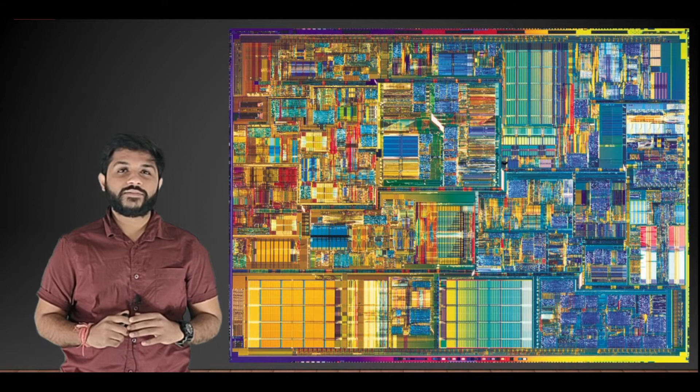The chip that you are seeing on the screen is actually a microprocessor. Now if you see inside that chip, you will see there are billions of transistors which are connected to each other, and there are different blocks which are present in the microprocessor. Some portion is the arithmetic and logical unit, some portion is the register, and much more. But by seeing this picture, you are not going to get which portion is which.

So that is why when you purchase any microprocessor, you will get a reference manual. In that reference manual, you will find how many blocks are there in the microprocessor, and you are also going to see a proper block diagram of the microprocessor. And let's see how the block diagram of the microprocessor 8085 looks like.

So if you want to store 8-bit data, you can use the registers B, C, D, E and H, L. You cannot use the registers W and Z because those are temporary registers, and those registers can only be used by the microprocessor itself. So the user cannot access those registers.

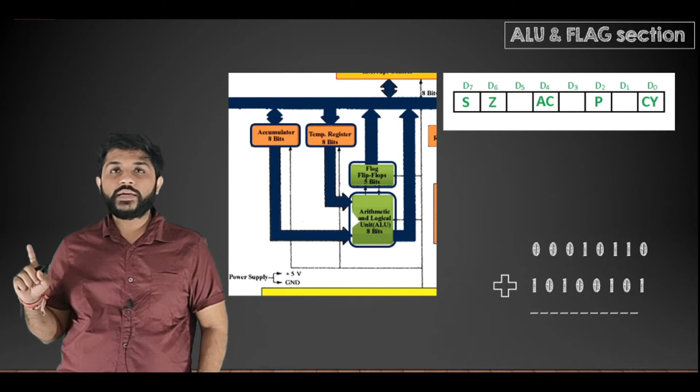So this is the example. We are performing the addition of these two 8-bit numbers. When you perform any arithmetic and logical operation, the flags will be affected. Now let's add these numbers and you will get the answer. Let's name these bits from D0 to D7.

Now for the sign flag: after performing any arithmetic and logical operation, if the value of the D7 bit is 1, the sign flag will be set. You can see that the value of the sign flag is changed to 1. If the value of D7, or the MSB, is 0, the sign flag will be reset, meaning its value will be 0.

Let's see when the zero flag will be affected. After performing any arithmetic and logical operation, if all the bits from D0 to D7 are 0, the zero flag will be set, meaning its value will be 1. Right now in the answer all the bits are not 0, so the value of the zero flag will be 0, that is, reset.

The next flag is the auxiliary flag. The function of the auxiliary flag we are going to see with a different example. Let's first see how the parity flag is changed. Right now the value of the auxiliary flag is 0.

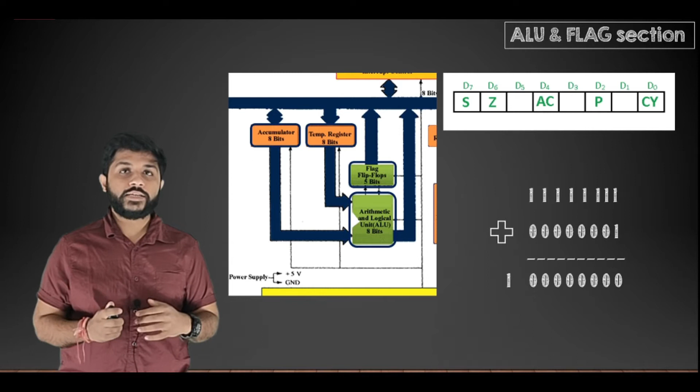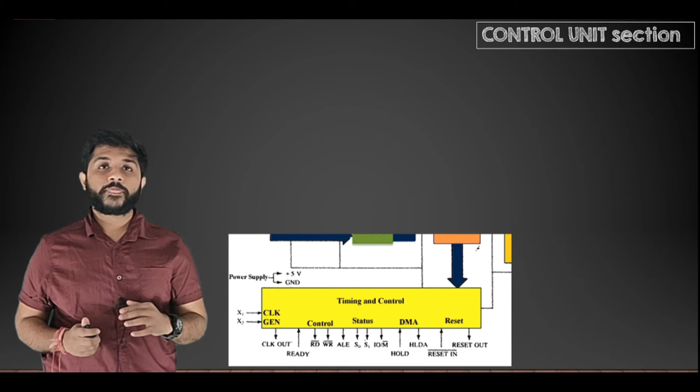The next pins are X1 and X2. Using these pins, you can provide a particular clock frequency to the microprocessor. Any microprocessor in the world requires a clock frequency to operate. You may have heard that your computer's microprocessor works on a particular clock frequency, let's say 2 GHz, 3 GHz, like that.

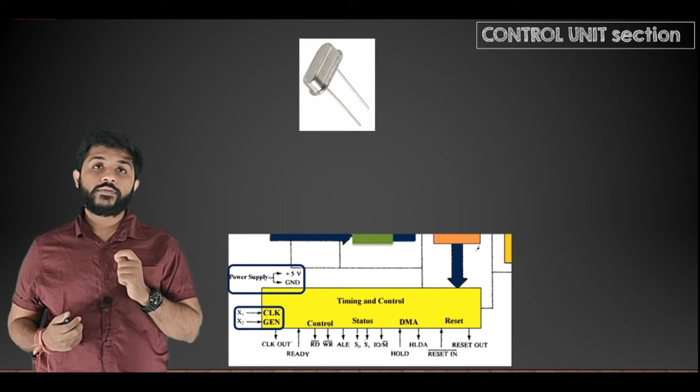Now always remember, the operating frequency of the microprocessor is the crystal frequency divided by 2. You can see that if we provide a crystal frequency of 4 MHz, the processor will operate at 2 MHz. If you provide a 6 MHz crystal, the processor will work at 3 MHz. So the internal or working frequency of the microprocessor is the crystal frequency divided by 2.

Now this internal frequency is available at the clock out pin. You can see that this pin is an output pin. It means that this pin can be connected to any peripheral device. And because the internal frequency is available at this pin, the peripheral device can synchronize itself with the microprocessor, so there can be no data loss.

The next pin is the ready pin. The ready pin is an input pin. So when any peripheral device is ready, it will inform the microprocessor by sending a signal at this particular pin. When the processor receives a signal at this pin, it will understand that the peripheral device is ready for communication.

The next pins are the control pins, which are RD bar, WR bar, and ALE. Notice these pins are output pins, and bar means these pins are active low. Using these pins, the processor can read or write the peripheral devices or the memory. The ALE pin is used to demultiplex the address and data bus, and when we discuss the demultiplexing of the address and data bus, we are going to see how the ALE pin functions. Right now we will only see the full form of ALE, which is address latch enable.

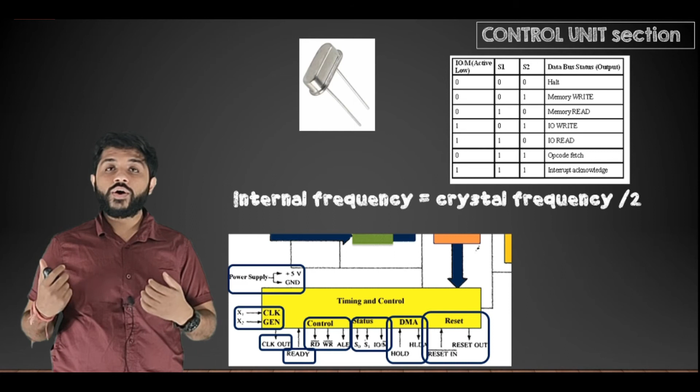And when the processor is reset, it will provide the acknowledgement at the RESET OUT pin. So if we are getting a high signal at RESET OUT, the user can understand the processor is reset successfully. So this is it for the control unit section.

Now let's see the interrupt section. Before going to the interrupt section, you should first know what an interrupt is. The processor will be performing its own program, its own process. When the processor is executing its own process and an interrupt is received, the processor will stop that process, hold it, and start executing the process which is initiated by the interrupt. After the process initiated by the interrupt is completed, the processor will resume its own process from where it stopped, and that is known as an interrupt.

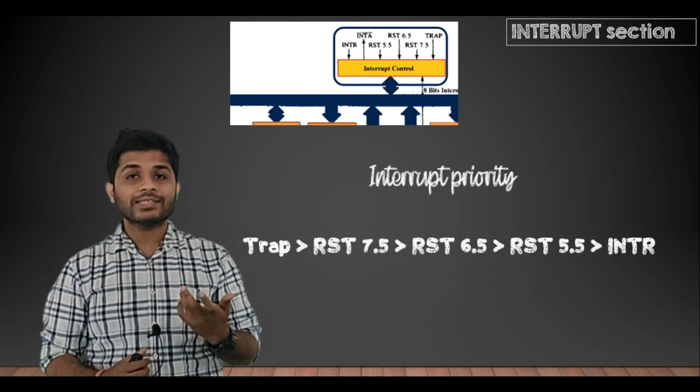So what is the meaning of priority? Priority means that if the processor is getting interrupts at 2 pins at the same time, the processor will execute the interrupt which has the highest priority. For example, the processor is getting interrupts at its 2 pins, TRAP and RST 7.5. So which interrupt will it execute? The TRAP. Why? Because it has the highest priority.

You can see that the TRAP is a non-maskable interrupt and the remaining interrupts are maskable. Now what is the meaning of non-maskable and maskable? Maskable means that if the processor is performing a very important program, the processor can mask those interrupts which are less important or not important. But the TRAP is a non-maskable interrupt. It means that if the processor is performing any important program and it gets an interrupt at the TRAP pin, it has to stop that program and execute the interrupt initiated by TRAP.

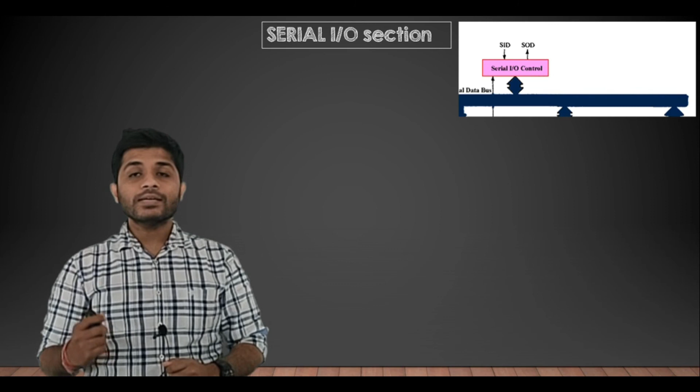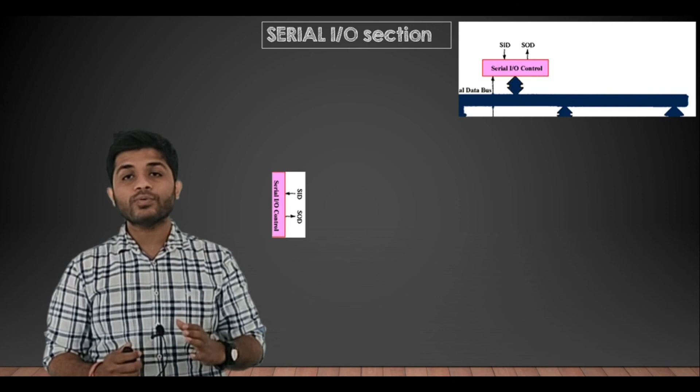Now let's see the next block, which is the serial input output section. Using this serial input output section, the microprocessor can send data to peripheral devices. There are 2 pins in the serial input output section, SID and SOD. SID means serial input data and SOD means serial output data. It means that if you want to send, for example, 8 bits of data, you have to send all these bits one by one. And if you want to receive any data, you have to receive all the bits one by one. You cannot send data in parallel, right?

Next, the block that we are going to discuss is the instruction decode section. For the instruction decode section there are 2 blocks: first the instruction register, and after that the instruction decoder and machine cycle encoding. To understand the function of this block, let's see one example. There is a memory, and in the memory one instruction is stored. You know the basic function of the microprocessor, right? When you start the microprocessor, it will fetch, decode and execute each and every instruction one by one. Right now there is only one instruction in the memory, so the processor will fetch that instruction, and when it fetches it, the instruction will move from the memory to the instruction register. So the fetch process is completed.

After the fetch process is completed, the instruction will be passed from the instruction register to the instruction decoder and machine cycle encoding block. In this block, the instruction will be decoded, and the processor will know how many machine cycles are required to execute one instruction. You can consider a machine cycle as the time required to execute an instruction. So in this block, the processor gets to know how much time one particular instruction requires to execute. Some instructions require less time and some require more time. After the instruction is decoded and the processor knows how many machine cycles are required, the decoded instruction will be passed to the control unit.

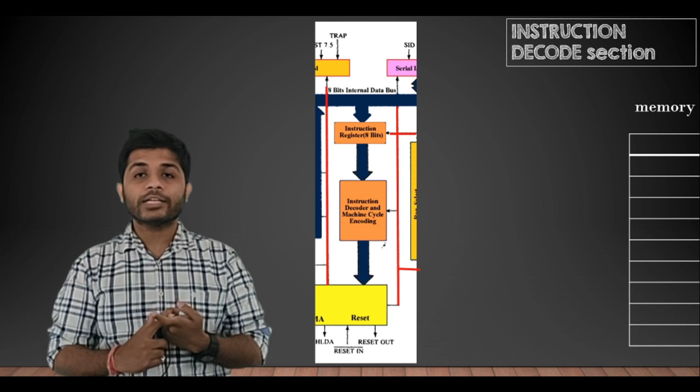The control unit is connected to different blocks within the microprocessor. So when the decoded instruction arrives at the control unit, the control unit will send different control signals. By sending these control signals, different blocks within the microprocessor will perform some task, and together the instruction will be executed. So to fetch, decode and execute one instruction, these blocks are used. And this is it for the block diagram of the microprocessor 8085.